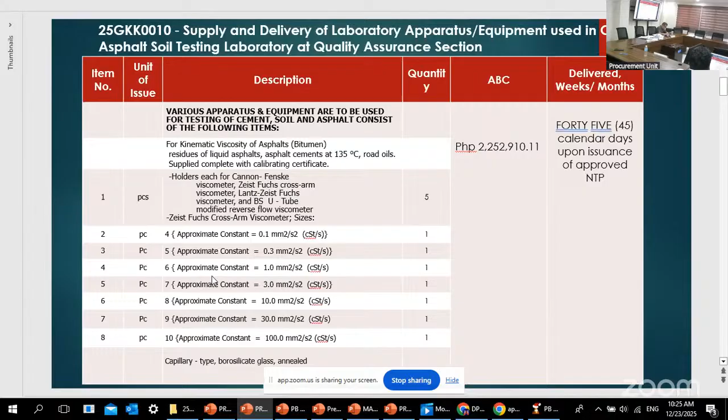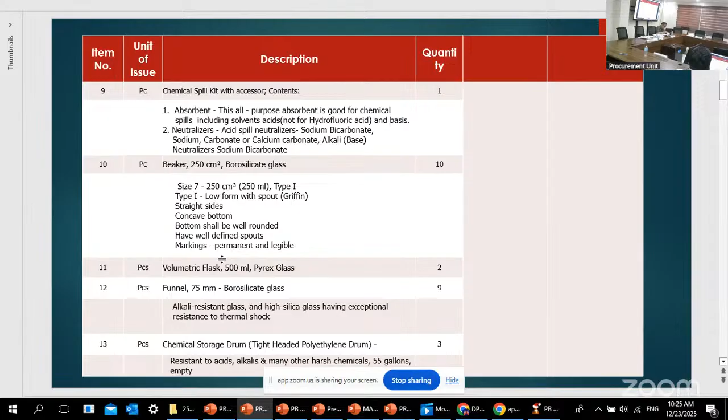Next, the chemical storage drum, 3 pieces, and concrete test hammer calibration anvil, 3 pieces, to be used for the calibration of the concrete hammer machine.

Next, a conical ring, plastic mold, 5 pieces, with square base plate, 5 pieces. Then graded sand, 7 sacks, natural silica and conforming to ASTM C778 for graded sand.

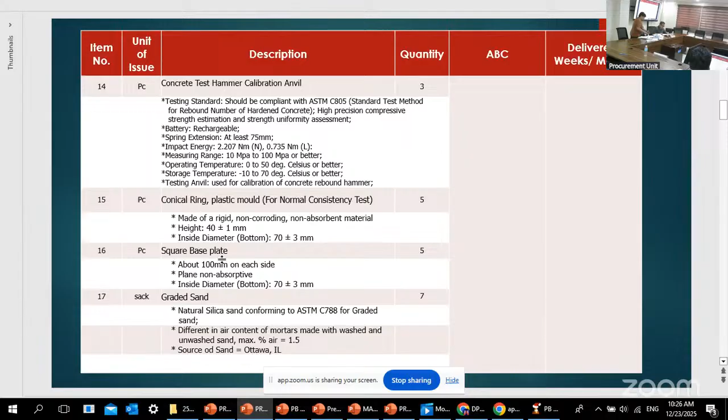And penetration cone needle, hollow brass, 1 piece, and pycnometer conical glass with stopper, 1 piece, and pycnometer glass round base, 1 piece. Receiving disk glass, 1 piece, and nitrile gloves, chemical resistant gloves, 100 pieces per box, 3 boxes. And Parafilm, 4 inches by 125 feet, 1 roll.

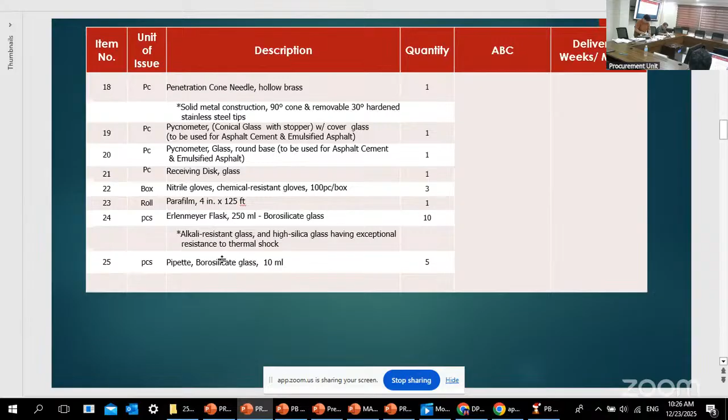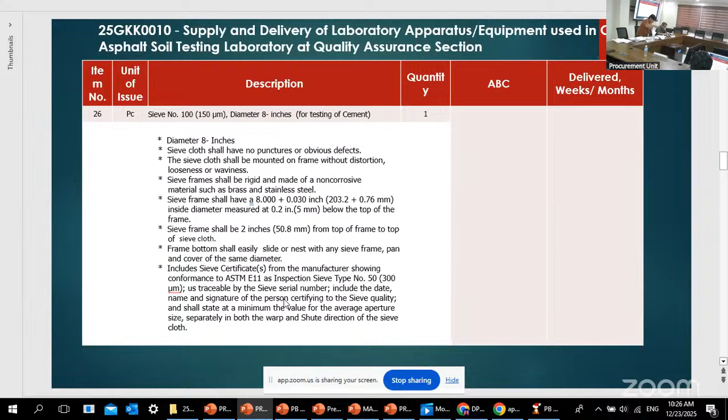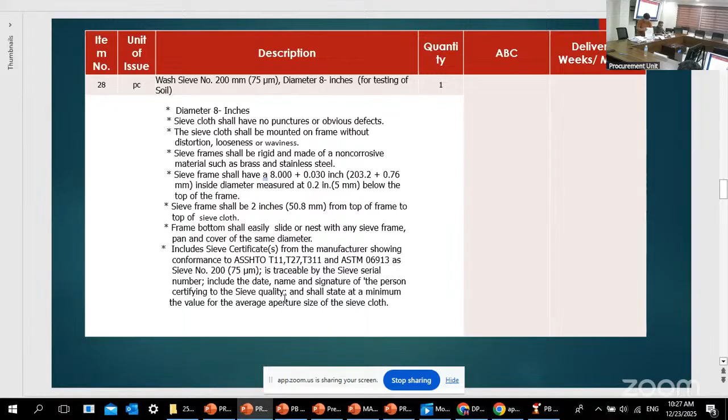And the next item is a sieve number 100, diameter 8 inches, 1 piece. And sieve number 50, diameter 8 inches, 1 piece. And next item is wash sieve number 200 mm. This is for the testing of soil, 1 piece.

Our next item is weights and reference masses, 1 piece. And sieve number 20, diameter 18 inches.

1 piece then. Beaker, 1000 cubic centimeter, borosilicate glass, type 1, low form with spout, Griffin, 10 pieces. And graduated cylinder, borosilicate glass, capacity 10 ml, 2 pieces.

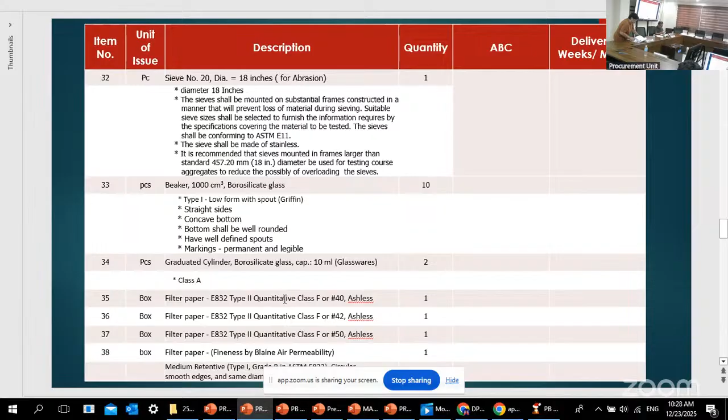And filter paper, size 40, 1 box. And filter paper, size 42, number 42, 1 box. Another filter paper, size 50, number 50, 1 box, and filter paper, 1 box for fineness and Blaine air permeability.

Next, the watch glass, 125 mm, glassware, 10 pieces, and another watch glass, 90 mm, glassware, 10 pieces.

Our next item is orthophosphoric acid, Anisha Chemicals, 1 bottle per 2.5 liters. Another is talc powder, 1 bottle. Oil or grease, 1 bottle. And desiccant silica gel, 1 kilogram.

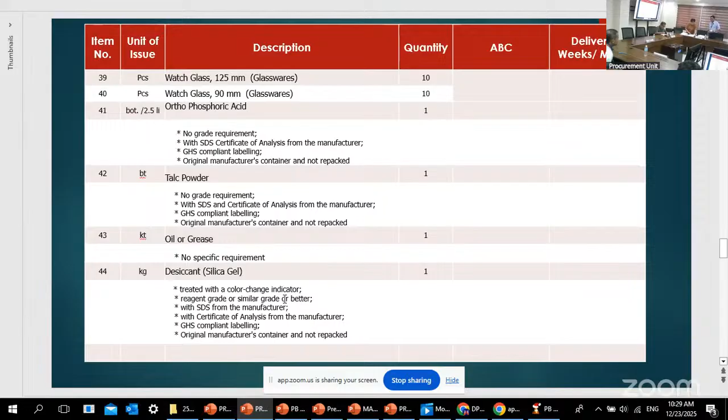And we have the chemicals for testing cement. Ammonium hydroxide, ammonia solution or ammonia, 2 bottles per 2.5 liter. Next, ammonium oxalate, 2 bottles per 500 grams. Next is ethanol, 95 or 99% reagent grade or similar grade or better, 1 bottle per 2.5 liter. And next, hydrochloric acid, 2 bottles per 2.5 liter.

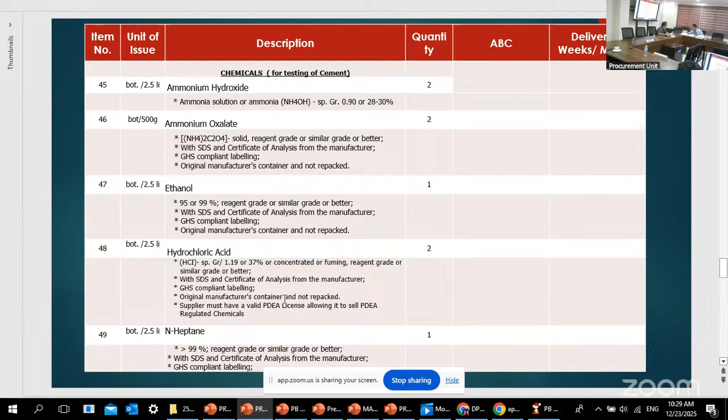Heptane, 1 bottle per 2.5 liter, 99% reagent grade. We have sodium hydroxide, solid reagent grade or similar grade or better, 1 kilogram. And the last one is the Le Chatelier flask, used to determine the relative specific gravity of hydraulic cement and lime, capacity, 250 ml, 1 piece. That's all.

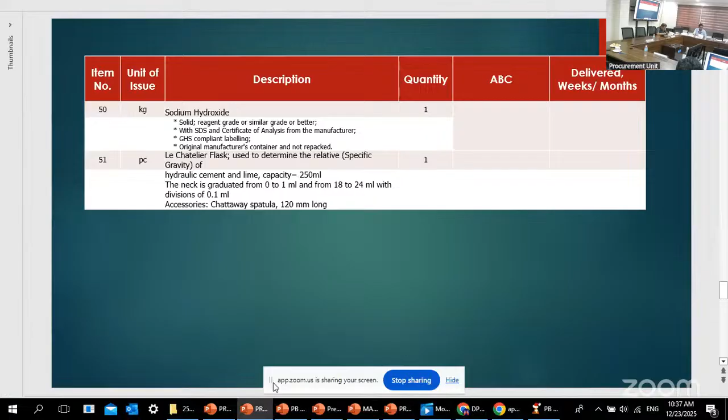For these procurement activities for goods and services: issuance or downloading of bidding documents, deadline will be on January 13, 2026 until 2 p.m. Hard copies are available at the BAC Secretariat, DPWH Misamis, and can also be downloaded from the DPWH website and PhilGEPS website. For the receipt by the BAC of bids, deadline will also be on January 13, 2026 until 2 p.m. For the schedule of the opening of bids, it will be on January 13, 2026 at 2 p.m., immediately after the submission of bids. So that's all for goods and services, Mr. Chair. Thank you.

Hello, thank you, Ma'am April. Since we are done with the goods and services, before we proceed with the civil works, may I ask for the last time if we have any questions from the goods?

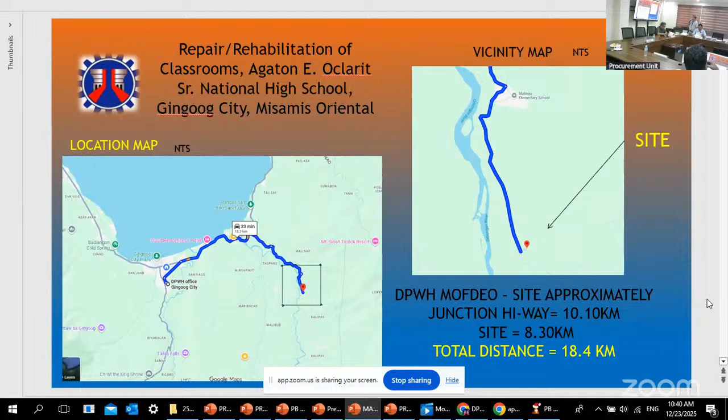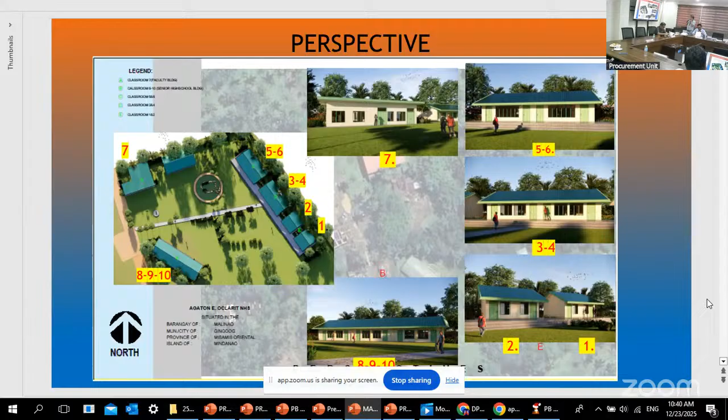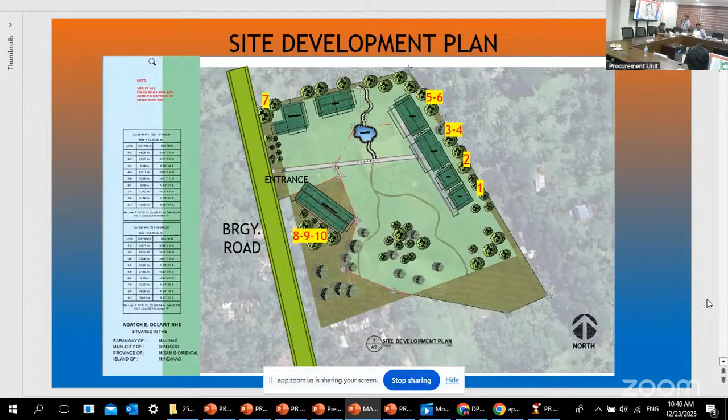This is our vicinity and location map. For our perspective, as you can see, there are 10 identified classrooms to be repaired and rehabilitated. We have rooms 1, 2, then 3, 4, then 5, 6, and 7, and the last building is rooms 8, 9, and 10. These are the actual pictures for classroom 1 and classroom 2.

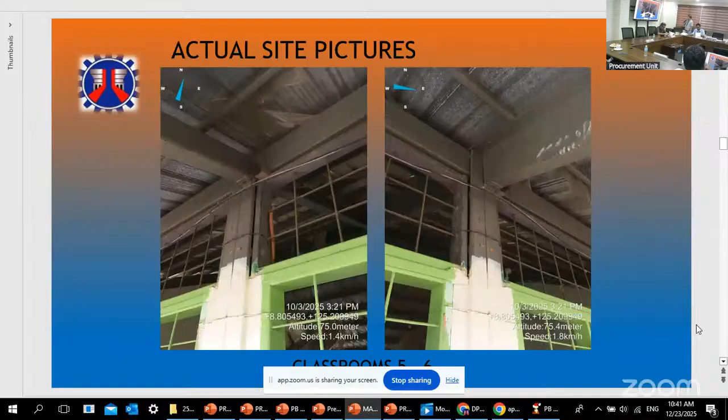For classrooms 3 and 4 also, and for classrooms 5 and 6. This is the actual picture of classroom 7. For classrooms 8, 9, and 10, this is the last building.

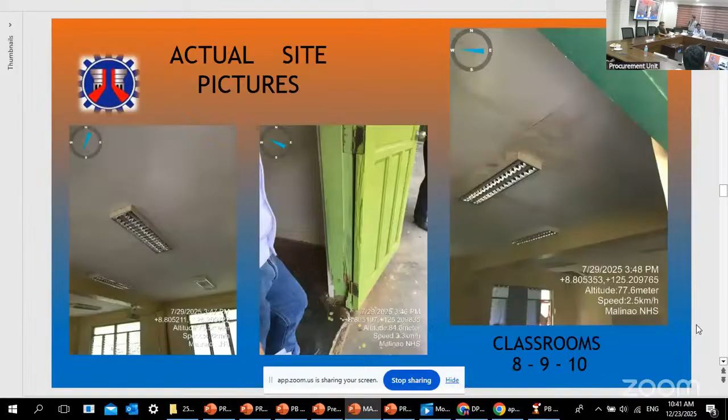For classroom 3 and 6: repair on concrete floor finishing and extension of concrete along the corridor, alley, and front steps, apply and wall plaster finish, repainting on wall and other masonry works, repainting on existing steel grills, remove existing window grills and replace with new jalousie windows, cover existing upper wall grills with Tyson board, remove and replace doors, refurbish door jambs, remove and replace roofing sheet, revise trusses and replace purlins, also installation of Tyson board ceiling.

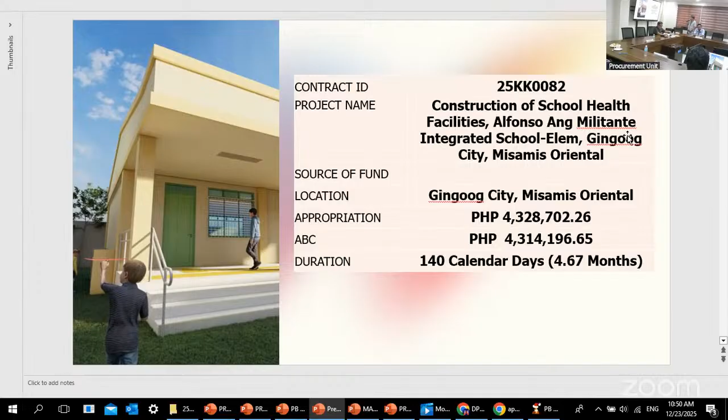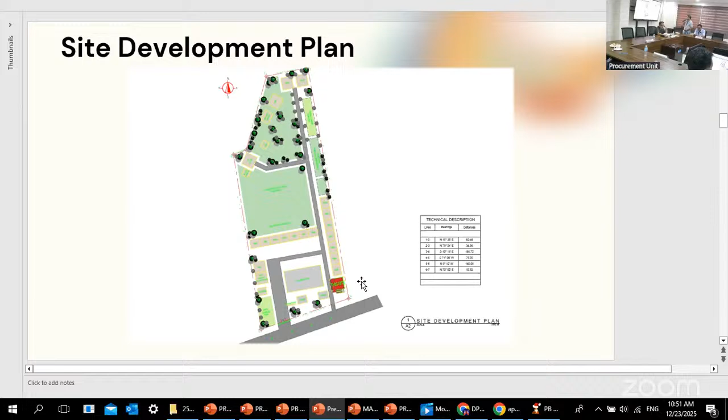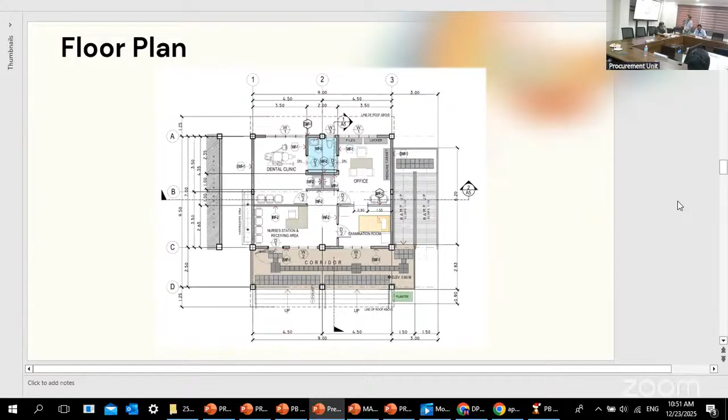This is the project site. Our site development plan, so upon entering the gate, it's on the right side. For our actual site photos, our floor plan, this is 9 meters by 9.5 meters. So this is our perspective.

So for project scope, we have embankment of 39.38 cubic meter of common soil, that is 0.6 meters from the natural ground line. We have complete structural components: reinforced concrete footing, columns, and beams, roof trusses, and roof sheets, including all roofing accessories, ridge roll, flashings, and downspout.

Complete masonry, finishing, painting works, complete windows and doors, complete ceiling with 10 mm thick reflective insulation, complete tiling works including tactiles, complete plumbing and sanitary works. We also have a complete septic tank, complete electrical works, complete mechanical works, air conditioning, ventilating system, and fire extinguisher.

We have hand washing area. We have carpentry works only for nurses station and receiving area table, office table, locker files, cabinet, and medicine cabinet. Built up letter stainless signages. 6 inches PVC pipe for our storm drainage leading to the highway canal is also considered.

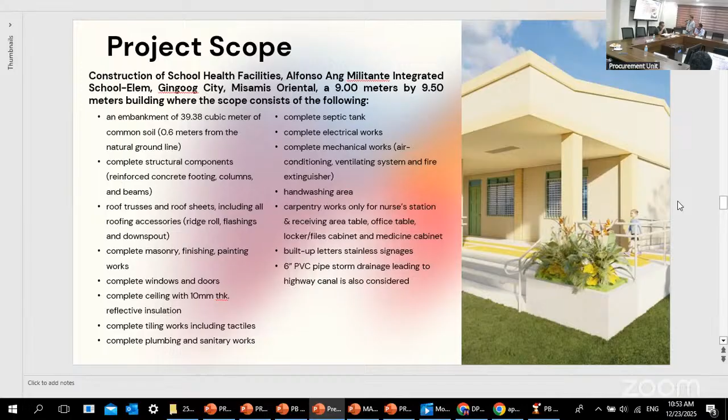So our bill of quantities: we have provision of engineer, rental basis, 4.67 months, permits and clearances, project billboard, signboard, occupational safety and health, mobilization, demobilization, general scaffolding and shoring, signages. For clearing and grubbing, 126.5 square meters. Structural excavation, common soil, 77.92.

Embankment, structural excavation, common soil, 45.05 cubic meter. Embankment, borrow, common soil, 6.51 cubic meters. Gravel fill, 16.29 cubic meters. Structural concrete, 3,000 PSI, Class A, 28 days, 13.2 cubic meters. Structural concrete, 4,000 PSI, Class A, 28 days, 31.74 cubic meters.

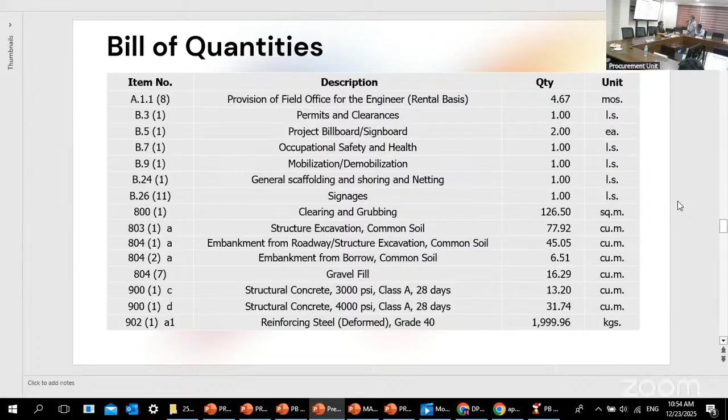Reinforcing steel bars, grade 40, 1,999.96 kilograms.

For grade 60, 3,454.92 kilograms. Formworks and false works, 202.41 square meters. Soil poisoning, 16 liters. CHB, 100 mm, 48.46 square meters.

For our CHB 150 mm, 88.3 square meters. Carpentry and joinery works, 1 lump sum. Finishing hardware, steel window, 1 lump sum. Glass awning type, 0.36 square meters. Aluminum glass windows, fixed type, 3.24 square meters.

Jalousie windows, glass, 11.44 square meters. Frames, jambs, sills, head, transoms, and mullions, 12 sets. Doors, flush, 8.82 square meters. Doors, wood panel, 2.1 square meters. Ceiling, 4.5 mm metal frame, fiber cement board, 105.3 square meters.

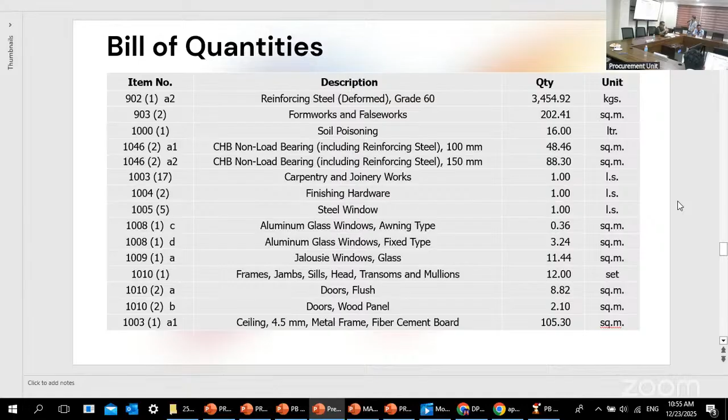Our molding, concrete, 18 meters. Waterproofing liquid, 43.92 square meters. Built-up and pre-formed membrane, 43.92 square meters. Glazed tiles and trims, 28.44 square meters. Unglazed tiles, 106.9 square meters. Textured unglazed tiles, 6.48 square meters.

Cement plaster finish, 266.59 square meters. Reflective insulation, 105.3 square meters. Railing, one lump sum. Painting works, masonry, concrete, 581.52 square meters. Painting works for wood, 4.2 square meters. Painting works for steel, 100.05 square meters.

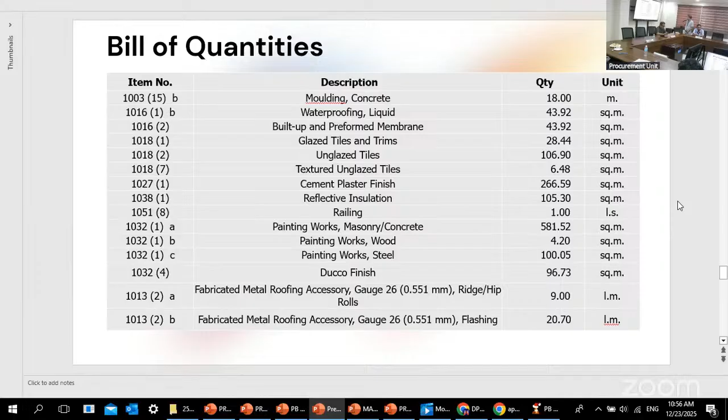Ducco finish, 96.73 square meters. For our roofing, gauge 26, 0.551 mm. Ridge hip rolls, 9 linear meters. For our roofing also, metal, gauge 26, flashing, 20.7 linear meters.

For pre-painted metal sheets, above 0.427 mm corrugated long span, 92.88 square meters. Metal structures, one lump sum. Metal structure bolts and rods, 14 pieces. Turnbuckle, 8 pieces. Sag rods, 23.43 kilograms.

For our cross bracing, 46.53 kilograms. For our metal structure accessories, steel plates, 91.45 kilograms. For our trusses, structural steel, 566.8 kilograms. For our purlins, structural steel, 676.13 kilograms. Concrete gutter, 18 meters.

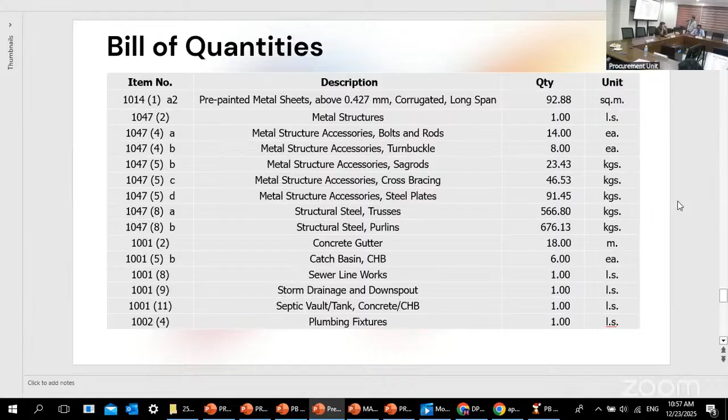Catch basin, CHB, 6 pieces. Sewer line works, one lump sum. Storm drainage and downspout, septic vault, plumbing fixtures, one lump sum. We also have cold water line for our electrical, conduit boxes and fittings, one lump sum. Wires and wiring devices, one lump sum.

Panel board with main and branch breakers, one lump sum. Lighting fixtures, one lump sum. Ventilating system, one lump sum. And lastly is our fire extinguisher, 4.54 kilograms with ABC bracket, 2 sets. That's all for our bill of quantities.

Mr. Chair, I would like to acknowledge the presence of Sir Jeffrey Luis Maestrado from Agaton, Oclarit Senior National High School. Good morning, sir.

Good morning, sir. So, do you have any questions or clarification? Sir, from your end user, do you have any questions, sir? From our Bids and Awards Committee? None. So we proceed with the

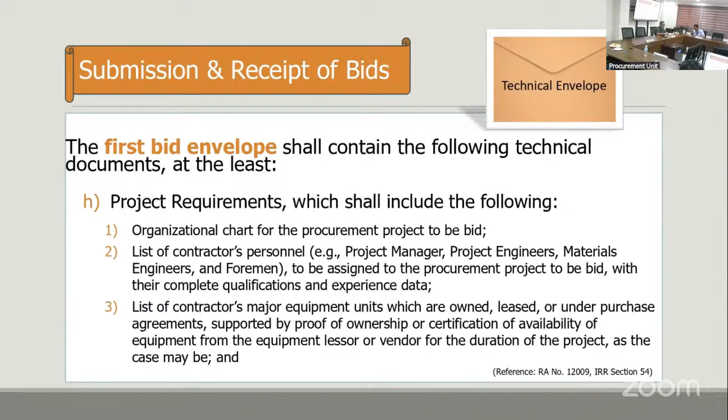1, the organizational chart for the procurement project to be bid. 2, the list of contractors' personnel, for example, project manager, project engineers, materials engineers, and foremen, to be assigned to the project, along with their complete qualifications and experience. 3, the list of contractors' major equipment units, whether owned, leased, or under purchase agreements, supported by proof of ownership or certification of availability from the equipment lessor or vendor for the duration of the project.

4, omnibus sworn statement in accordance with section 54.3 of this IRR. 5, latest general information sheet, GIS, reflecting the beneficial ownership information, BOI, duly received by the Securities and Exchange Commission, SEC, for corporations. And 6, sworn affidavit of eligibility and beneficial ownership, following the template attached as Annex A for all bidders, including sole proprietorship.

For bid security, all bids under competitive procurement methods must be accompanied by a bid security. The bid security serves as a guarantee that the bidder will enter into a contract if awarded the project. The bidder shall submit either a bid securing declaration or any form of bid security in an amount not less than the required percentage of the ABC, according to the following schedule: cash or cashier's or manager's check issued by a bank, 2% of the ABC; bank draft or guarantee, or irrevocable letter of credit issued by a bank, 2% of the ABC; surety bond callable upon demand issued by a surety or insurance company, 5% of the ABC.

The omnibus sworn statement must be executed by the bidder or by its duly authorized representative. It should contain the requirements outlined in section 54.3 of the implementing rules and regulations of RA 12009, contractors' key personnel. The key personnel should meet the following number of years' work experience.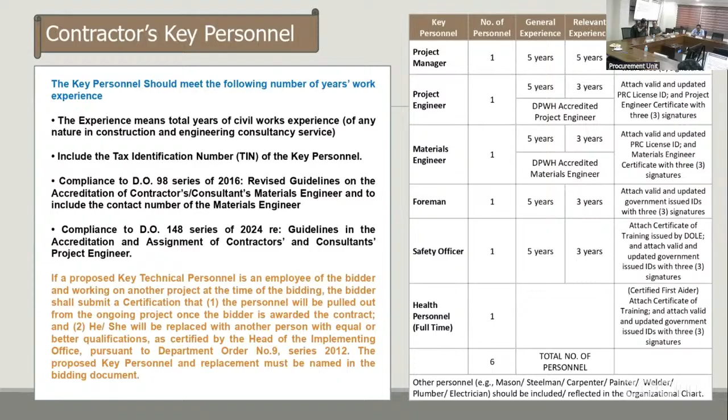The fifth personnel is 1 safety officer with 5 years of general experience and 3 years of relevant experience. A valid and updated government-issued ID with 3 signatures should be attached, as well as their certificate of training issued by DOLE. The last personnel is 1 full-time health personnel. A valid and updated government-issued ID with 3 signatures should be attached, as well as their certificate of training.

For contractors' major equipment units, the contractor must provide proofs of ownership or other supporting documents for equipment that is owned, leased, or under purchase agreements. For leased or purchased equipment, a certificate of availability from the lessor or vendor must be submitted for the duration of the project. Proofs of ownership and supporting documents must specify model and year, capacity, performance or size, plate number, motor number, body number, chassis serial number, engine serial number, and specific location and condition of the equipment. These requirements are in accordance with Department Order 58, Series of 2012.

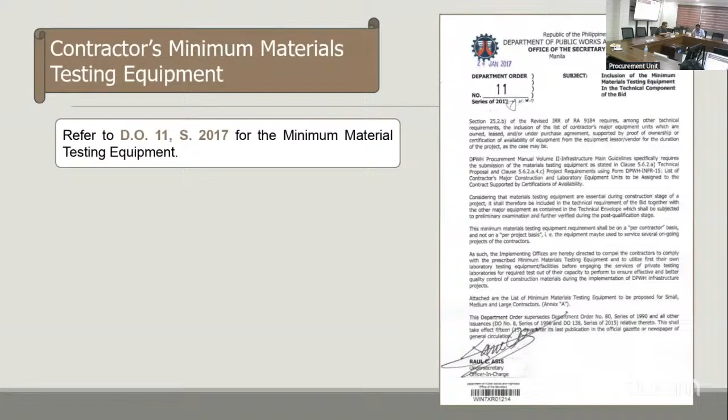For contractors' minimum materials testing equipment, refer to Department Order 11, Series of 2017 for the required equipment capability.

The second bid envelope shall contain the following financial documents: original of duly signed and accomplished financial bid form; original of duly signed bid prices in the bill of quantities; duly accomplished detailed estimates form, including a summary sheet indicating the unit prices of construction materials, labor rates, and equipment rentals used in coming up with the bid; cash flow by quarter; and detailed estimates.

According to DO 197, Series of 2016, the following items shall not be subjected to OCM and profit markup: mobilization and demobilization, provision of service vehicle, permits and clearances. Also according to DO 197, Series of 2016, the following non-civil works items shall not be subjected to OCM markup: field, laboratory office, and living quarters on rental basis; furnishing of furniture, lab equipment, survey equipment and consumables; assistance to the engineers, photographs, health and safety, traffic management, environmental compliance, communication equipment, etc.

Submission and receipt of bids. Bid submission may be done manually or electronically online. However, bidders should only select one mode of submission, either manual or electronic. The address for receipt of bids submitted manually is the BAC Conference Room, 3rd floor, DPWH Misamis Oriental 1st DEO, Barangay 26, Gingoog City, Misamis Oriental. For electronic submission: electronic bids, Misamis Oriental 1, at dpwh.gov.ph.

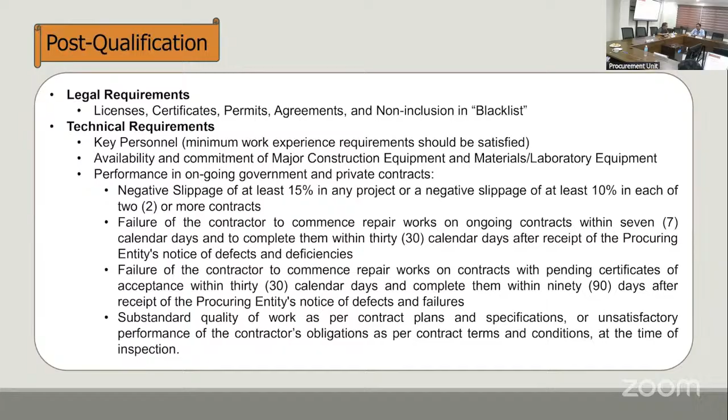Substandard quality of work as per contract plans and specifications, or unsatisfactory performance of the contractor's obligations as per contract terms and conditions at the time of inspection. Financial requirements, bid price proposal.

All the eligibility documents supporting its PhilGEPS certificate of registration, platinum membership, its latest income and business tax returns filed for the preceding quarter, which should not be earlier than 2 quarters from the date of submission and receipt of bid, and other appropriate licenses and permits required by law and stated in the bidding documents.

Board, the BAC shall recommend to the HOPE the award of contract to the bidder with the LCRB after the post-qualification process has been completed.

Within 10 calendar days from receipt by the winning bidder of the notice of award, the following conditions should be complied before the contract may be awarded. Submission of the following documents by the winning bidder.

Valid JVA if applicable. A valid PCAB license and registration for the type and cost of the procurement project to be bid for foreign bidders in infrastructure projects, when the treaty or international or executive agreement expressly allows submission of such license and registration as a precondition to the notice of award, or the SEC certificate of registration of the foreign corporation, or the SEC certificate of registration of the foreign consulting firm, or the authority or license from the appropriate government agency or professional regulatory body of the foreign professionals engaging in the practice of regulated professions and allied professions, where applicable. Posting of performance security by the winning bidder in accordance with Section 39 of this IRR.